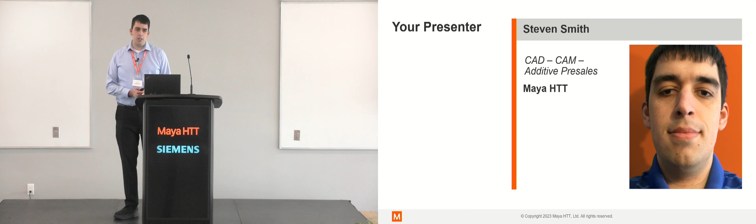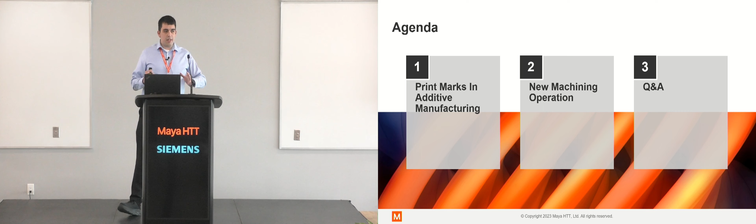So, quick overview of the agenda for today. On the additive side, I really want to talk about some of the new functionality around print marks. What we see with additive manufacturing is that it's only really being used, at least on the metal side, in what I would consider to be highly regulated industries, right? So aerospace and defense, the military, medical, and the reality behind those industries is that traceability is king, right?

If you don't know the history of the part, you may as well not have made the thing. So how do we streamline that? How do we work around it? For the second part of this talk, I want to talk about some CAM operations, specifically around milling, some of the new tool paths that are available, 2306 and moving forward. And we're going to wrap up with a quick Q&A at the end.

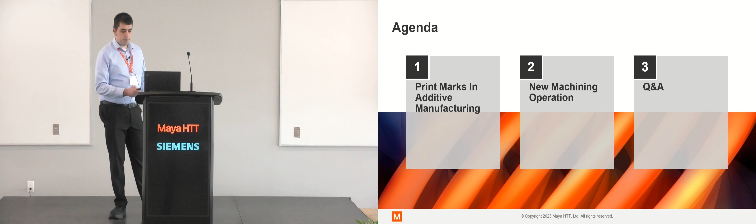So when it comes to additive manufacturing, really the one thing that I want everybody to walk away with is an understanding that Siemens offers a true end-to-end solution. We could easily spend an hour presentation on each one of these individual topics. So something like topology optimization, I'm just going to say that we have it, we can do it based around various objectives. I'm not going to get into it because we're limited on time, but what I want to talk about here, especially with the digital thread, is that we're able to take that data set and move it across.

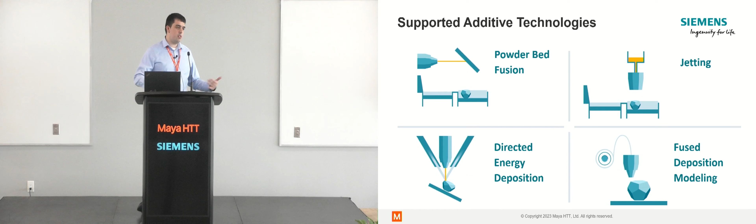Everything stays linked, and the advantage to that is when you have a minor design change, you're not having to rework your entire process. On the additive side, we support the four, I'm going to call them major technologies: your powder bed fusion, your binder jetting, your directed energy deposition, and your FDM. Anything that isn't purely one of those four typically is close enough in terms of a process strategy that we can adapt one of these four core technologies to. So we support not only the full end-to-end workflow, but also all the major additive methods.

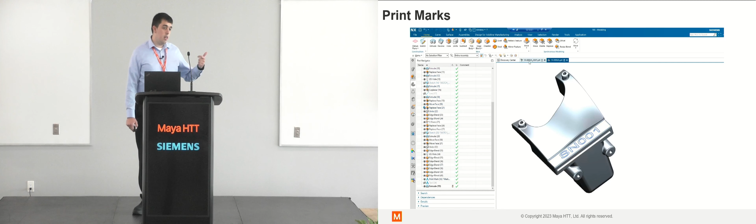When it comes to print marks, I think this is something that's interesting. The way that we're handling this now is in the design environment, the designer is going to set the location, the font, everything about that, and just designate. The actual 3D geometry gets created in the additive build tray where we're defining things like our support material. And that's what we see here. So it's actually a feature name, which makes it very easy for us to automate.

It also means that we get that level of traceability, because if this is a PLM controlled file and you want to know, well, what happened with serial number 22? What machine was it on? What were the other parts on that build tray? We can answer all of that.

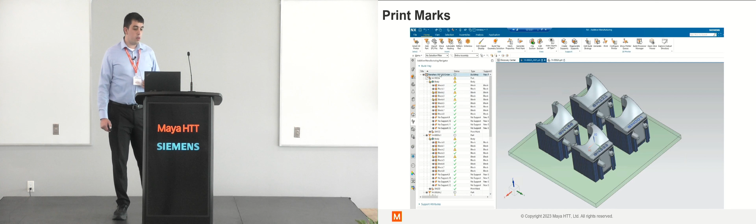Here what we're doing is just making a very small design change. And instead of having to re-support the full end-to-end workflow, all we're doing is jumping into our build tray. We're going to update the geometry, and it will automatically recognize that certain areas were lacking support and extend the existing support strategy to those new regions.

Most of the industry today around additive still handles a lot with universal file formats, whether those are STEP files, STL, 3MFs, there's a multitude of them. But what ends up happening is that they're not linked. So this is the classic scenario: the machine shop ends up calling back the additive guy and going, hey, when we tried to clean up that face or clean up a bore, we didn't have enough material, a little bit too much distortion.

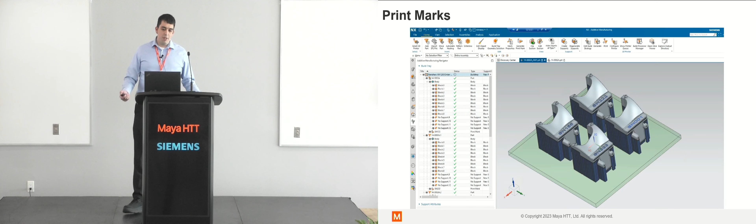Can you add an extra 30 thou on that surface? And sure, you can. But if you're doing everything in an STL-based workflow, you now need to put all of that engineering effort back into re-supporting, re-simulating everything. By being an integrated end-to-end workflow, what we're able to do is, as you saw in that previous example, just migrate that change over and save a lot of time.

And really what we're trying to do is reduce the amount of time that's spent on what we consider non-value added engineering effort, right? So you've already done the bulk of the work once. You really don't get anything by sort of duplicating those efforts over and over, and customers aren't really willing to pay for more of that effort.

Now, as we switch over to the machine shop and the milling side of things, what I want to compare is our cavity milling, which is an older operation type, to the new 3D adaptive roughing. So in this case, I'm using 2306 as my platform. That's what I'm using just to generate these comparisons.

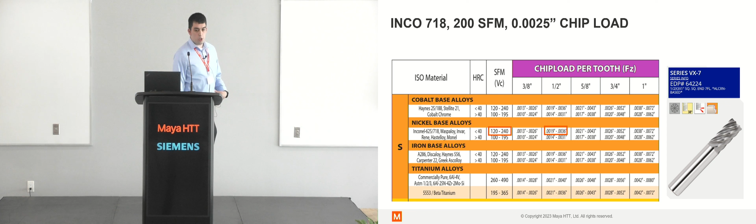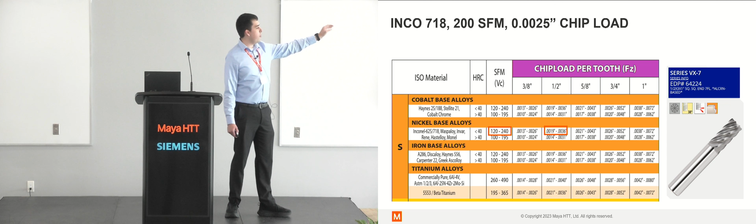So I assumed that the previous part that I was showing was made of Inconel 718. We're going to run 200 SFM with a 2.5 thou chip load. These numbers are largely arbitrary, but they fit relatively midpoint within the recommended parameters from the cutting tool manufacturer.

When we talk about how that translates over to our cutting parameters, some of them we've already gone over. In terms of engagement, we're going to be using a 3/4 inch axial engagement. This is a 1/2 inch end mill. We're going to be using 15% radial. We are correcting for chip thickness because our radial engagement is so low. So our programmed feed rate is going to be 3.5 thou, but our actual chip thickness is at 2.5.

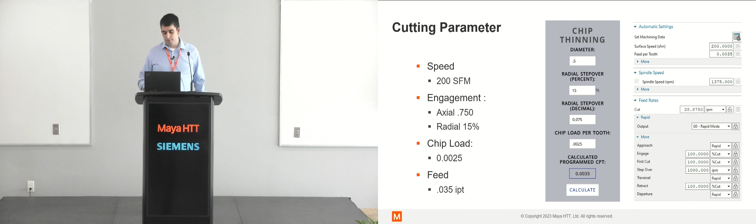So how am I going to present the comparison between these two manufacturing strategies? We're going to take a little bit of a detour into a third-party tool called NPRO. NPRO is a commercial development from the University of British Columbia. These guys have been doing FEA-based machining simulation for many, many years. And in this case, we're just going to be comparing toolpaths.

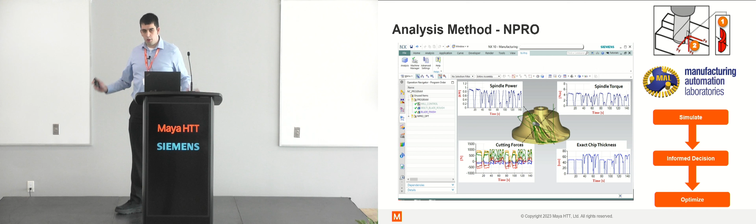NPRO has the ability to also do optimization around different objectives, but just for the sake of this discussion, I really want to compare the older manufacturing strategy with the newer one in NX, no third-party optimization. So one last look at what the two parts are. It's obviously identical parts, just a different toolpath.

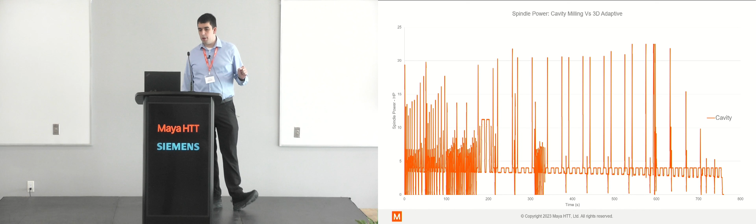So the first graph that I want to look at is cavity milling. This is the horsepower required to drive the tool over time. The way that NPRO works is it takes your entire toolpath and divides it into about 1 millimeter segments. We find true cutter engagement at each one of those points. We compare that to the material table to understand the torque, power, and feed force required to drive the cutter through the part.

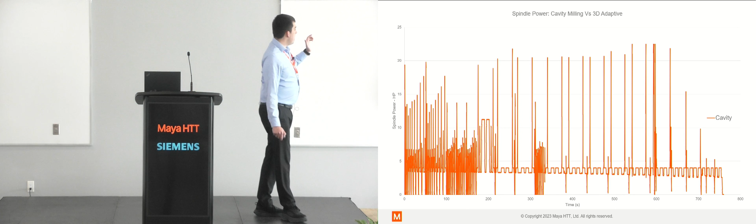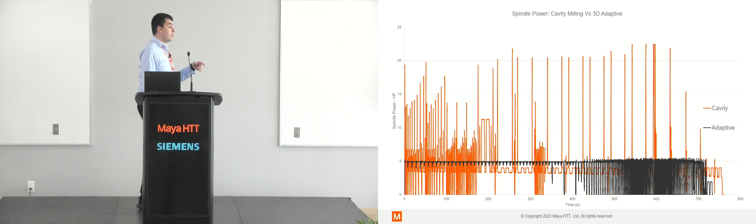What we see here is the x-axis is time, the y-axis is spindle power. So these are instantaneous spindle requirements. This is the older operation strategy. What I want to talk about is the new tool. So yeah, it is a little bit faster, but more than just being a little bit faster, it's a lot more consistent.

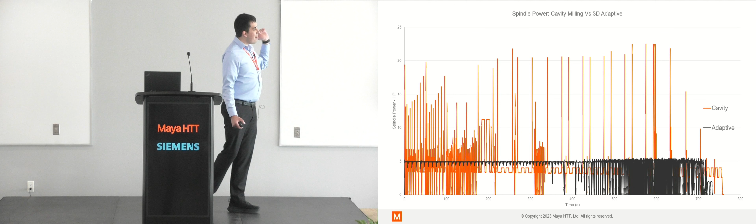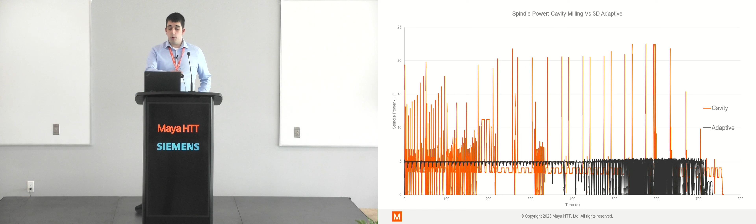So the easiest way to think about machining is we want to be productive, to be profitable. We want to have the highest average power consumption with the most even process we can. Right? Each one of these spikes is what's going to get us in trouble. That's where end mills are going to break. That's where parts are going to move on the table. That is what we're trying to avoid. What we notice is that while the peak forces on the new adaptive strategy are much, much lower, because the average is a little bit higher, the cycle time's a little bit shorter.

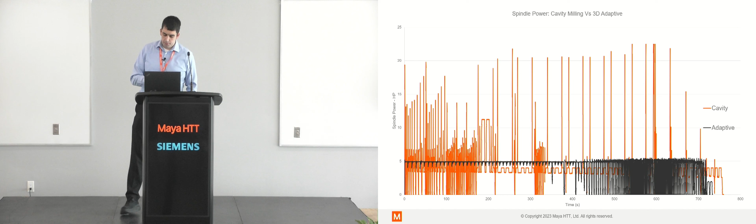So horsepower is one thing for us to discuss. How does it compare to some of the other parameters that we want to talk about? So let's talk about what happens with chip thickness. So the actual older tool, cavity milling in orange here, didn't do a great job of respecting our 2.5 thou program feed rate. It averaged it pretty well, but again, we had those spikes.

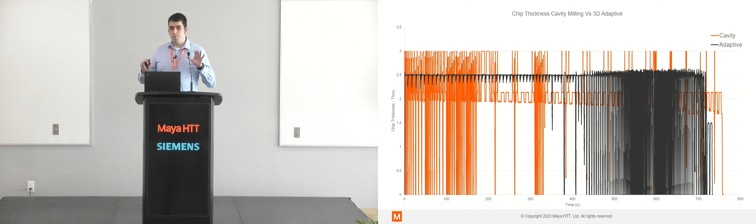So what I'm going to do now is I'm just going to propose that if somebody was making that previous part with those feed rates and everything else, I would propose that we can actually increase our chip load by about 20% using the new tool and be fairly similar in terms of peak forces, but now start to realize some pretty significant time reduction.

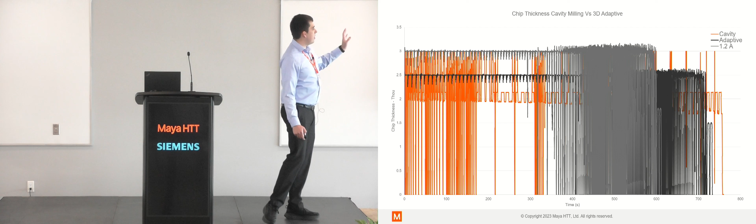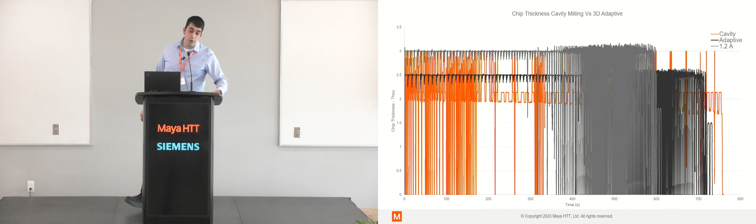So in this case, maybe it's not exact. What I did is I just multiplied our chip thickness by 1.2. That's the gray overlay. And now on the x-axis, we see that we're starting to make some significant time savings. When it comes to the manufacturing world, when it comes to machining, time is money. The faster that you can get a part out the door lets you run the same volume with less machines, which is always going to be a win.

Let's talk about bending force. So that's the next big one that we need to talk about. So when we're talking about bending force, what we really want to talk about is what does it take to drive that tool through the cut, right? How much does the axis of the machine need to push the part over? So here again, we're doing that basic comparison.

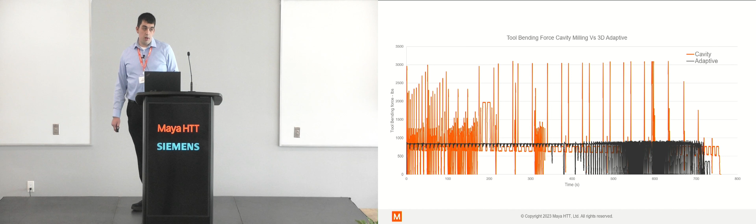And again, the older cavity mill has been around many years; there's got to be millions of parts that have successfully been manufactured with it. What I'd like to point out is just how much better the new adaptive strategy is. We almost entirely get rid of those load spikes, and especially when it comes to bending force, that's what tends to break end mills. That's what tends to make parts slip in fixtures, right? So if you ever had a part and the vise moves on the table, most of the time that's because of your peak forces.

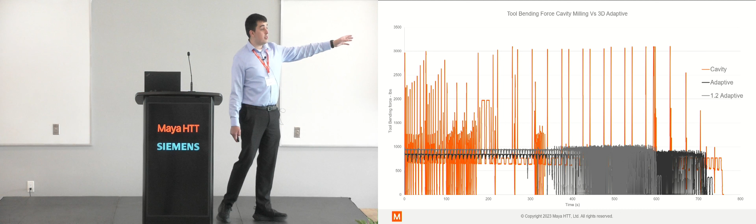Again, we can talk about what happens if we increase those by 20% that I was proposing a couple slides ago. Well, even with that 20% increase in chip load, which now we're talking about reducing cycle time about 25% from the original operation, we still have a very, very reasonable bending force compared to the original cavity milling operation.

This opens up a little bit of a discussion. Because the new operation is so much more stable, do we start talking about going to larger tools, larger depths of cut? How do we gain even more productivity? Because really now our spikes are about a third of what they used to be. So if you were successfully manufacturing parts before, there could be some significant optimization potential here.

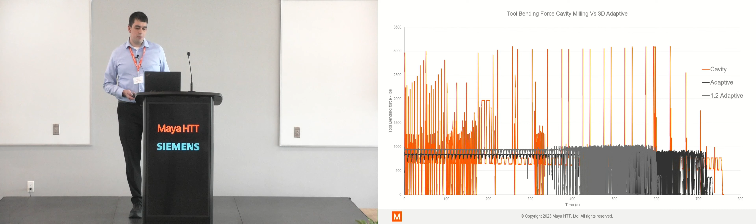So key takeaways on this in terms of comparing. The 3D adaptive that I presented here is the 2306 version. If you haven't given it a try, I strongly suggest that you consider giving it a try. In terms of the cost reductions, I'd really like to look at three aspects of it, in the order that you'll probably recognize them. So the first one is cycle time. You'll immediately recognize that reduction in cycle time, increase in productivity.

The next one is by removing those load spikes, we actually expect our tool life to increase. Tool life will increase measured in consumable cost per part. It may be fairly similar in terms of the number of tools you'll go through in a week, but you'll get more parts out of your shop in that week.

The last one is going to be spindle and general machine life. Right, so these load spikes are what's difficult on a machine. It's what will ultimately lead to having to rebuild spindles. So the better that we can treat those spindle bearings, the longer they last. Another little cost savings for us there.

Key assumptions here that I just want to highlight: especially for that 20% increase in chip thickness, I'm assuming that our process is stable. We're not fighting chatter. And my second assumption is that you're able to actually evacuate that chip. There's enough room in the flute of the end mill, and you've got enough coolant flow. If you're in a deep slot or something, this may not actually work just because of chip evacuation concerns.

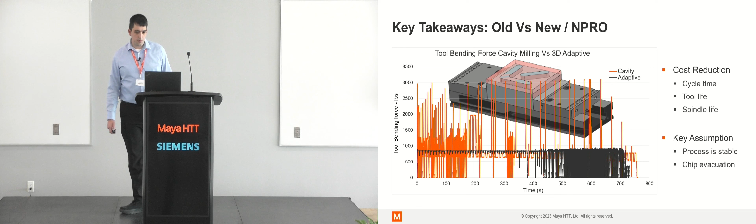So with that, it was a little bit on the shorter side, but if we've got time for any questions.